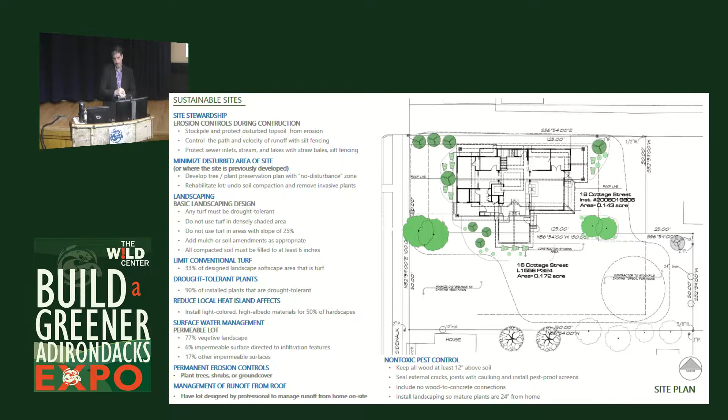We tried to keep the lot at over 77% vegetative landscape. You'll see that we did incorporate a lot of rainwater management and control. But even during construction, we were very careful as far as how we disturbed the site. So we fenced off this entire area here, which had some nice existing vegetation, so that contractors couldn't go there at all. And then we created a stockpile area for soil and for certain things to be staged on the project, and then protected that with erosion fencing.

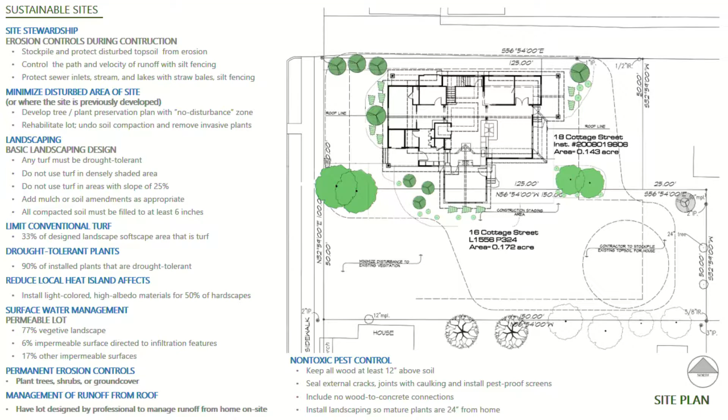So it was a little bit of a hassle from a contractor standpoint, but in the end, it really made a difference, because that whole prominent corner, which was really the front of the house, was able to be undisturbed. And as we got into the landscaping design, we used native plants, we used drought-tolerant plants, and we tried to minimize the amount of turf area, so less than 33% turf.

When it came to the building itself, we looked at lightly colored materials, so even though we knew the roof was going to have photovoltaic panels and solar hot water, we looked at using some lighter colored materials, and looked at where we could put permanent erosion control too. Even though you're in an urban environment, in most urban environments all of the stormwater runoff just ends up in the storm sewer. And there's rarely requirements for stormwater management and control on a single family house in an urban environment. But in this case, it was really thought about to try to minimize that impact onto the storm sewers.

But we took careful attention to the selection of the paints, stains, glues, adhesives, what the cabinets were made of. They used local woodworkers to make cabinets, all out of natural wood, solid wood products. We minimize the use of even plywood in certain components of the house. And we use low or no VOC paints and finishes.

Along with that, there was a real desire to use recycled or reclaimed products. So Katie, who's one of the owners, went to different salvage stores and looked for interesting architectural elements, and we thought about how they could be incorporated into the house. So you'll see some examples of that.

The house is a passive design. It faces solar south. We put a sunroom on the south side with a slab and tile floor, and surrounded it with glass, and had windows and doors that would open up to it, so that could act as sort of thermal mass in the house.

In addition, in the center here, there's a Kachelofen stove, or what you call a Finnish stove, so a masonry heater. It was built by a local mason. With most of the conventional American colonial fireplaces, 90% of your heat goes out. Great thing for ambiance and aesthetics, but not a super efficient heating source. So here the exhaust actually goes out the side, down and through a series of tubes, and then back up. And those tubes are worked into the masonry.

This was a quartzite stone. Probably one of the most efficient is like a soapstone product, but the quartzite holds and radiates the heat really well. It's also a locally quarried Champlain stone product. And the heat is so efficient that you can actually create a bread oven above it to utilize that excess heat.

You can see here that this house is unique because they have their own business and they work from home a lot, and they had 2 kids at the time that were young and growing, and they had some aging parents that came. And so how do we combine work, live, parents all in one space, and children, and how are they going to grow in the house?

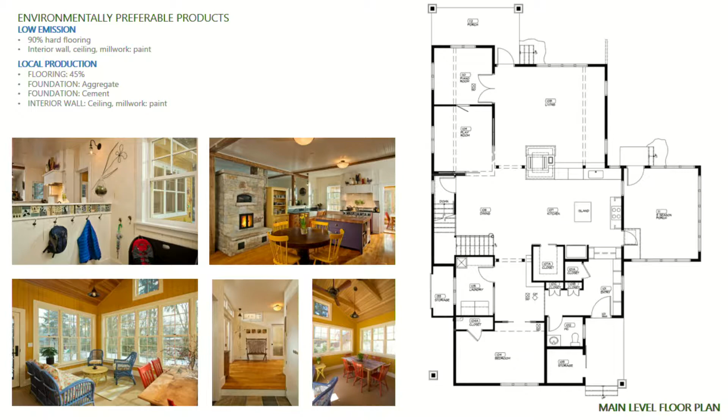We had a front bedroom, thinking of aging parents in time, that they may end up staying here, or his mother, and initially it would serve as an office, and then a playroom for the children, that had a series of large sliding doors that would open up and be a flex space as the children aged. You want to be able to close those doors so you don't see the mess when guests come over sometimes, but later on in life, it just becomes sort of an extension of the dining room and

the living room. And the family is very musically oriented, so we had a sound rated room where they had the piano and they could practice, and Katie teaches piano lessons, so when she has people over and she's teaching people, they can kind of isolate that from the rest of the house.

The materials inside, a combination of poplar and cherry, and simple, and a lot of pine, tongue and groove pine planking, locally sourced and milled. All the wood and timber in this house was from FSC certified sources, so that was something they were really committed to. And this was in 2009, 2010, so it was a little harder back then to find all the sources for that, but that was something we were able to do. Coming from sustainably managed forests was a priority for everyone in the project.

You can see as you move to the second floor, that open plan really continues. So in a lot of our designs, we try to avoid hallways. The most efficient and cost-effective structure to build is a square, right? So your ratio of exterior wall to interior wall is 1-to-1. And also, we often try to design on a 2-foot module so that we're really minimizing construction waste.

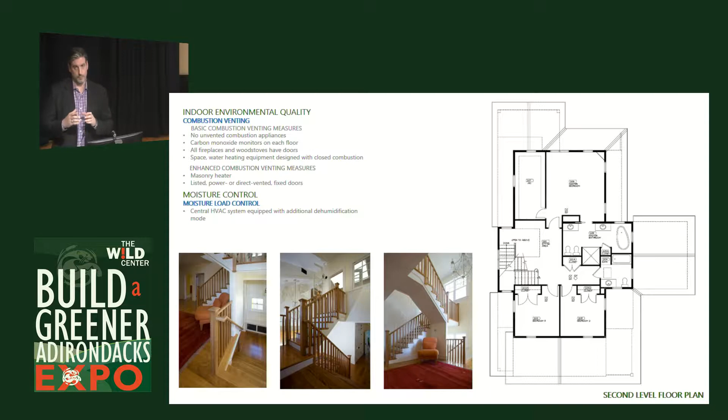Probably one of the biggest achievements of this house is the builder who was hired, and the carpenter really took minimizing construction waste to heart. So we did 2-foot framing, we planned out all the studs, all the sheets of plywood, and then any of the scrap studs he kept and stockpiled and used for blocking or for infill. At the end he had a picture, which I wish I had, of what was left at the end of the job, and it was really an amazing thing. And I give complete credit for that to the builder, managing the crews and thinking things through the job, so really minimal waste.

Fairly simple plan, second floor master suite with the two spare bedrooms for the 2 children. You'll notice in the plan we stacked all the plumbing in one area, which is really over in this area, and that translates down through all the plans. The HVAC system was a high-efficiency system. I mentioned the geothermal, put high filtering in, and also dehumidification control.

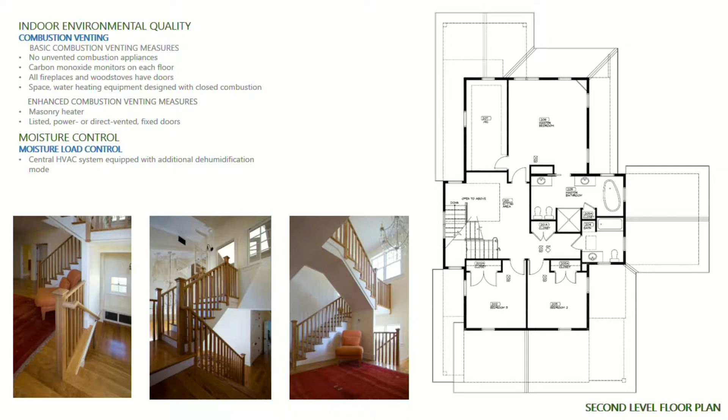So moving up, probably the most unique feature is that they also teach movement and dance classes. So where are they going to put this space? Originally we thought of it as its own little barn or its own little structure that might be on that second lot, or it might be an appendage. And really through planning, we said, let's keep this as efficient as we can. And we stacked these things. We had a side door that comes into that stair there, and they go up one flight into the music room. So this is more of a public space.

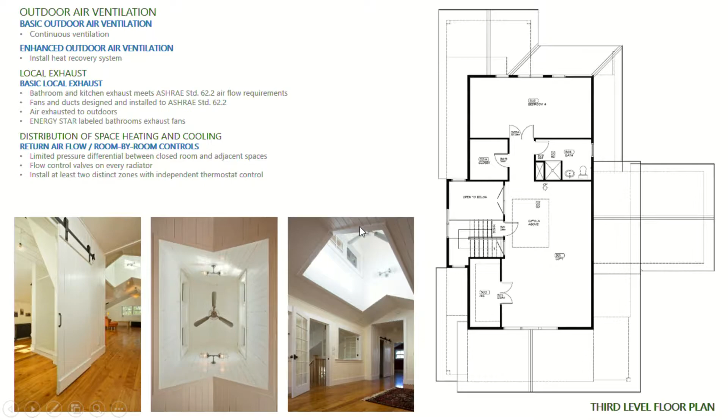And then some overflow sleeping bedroom, but this is the movement space here. Here's that stair that opens all the way down to below. You'll see that we put a door at the top and some windows, so if they want to close it off and try to separate sound, we can do that, but allow that thermal chimney to take effect. So here's some pictures of how that worked. Just a little overview of that.

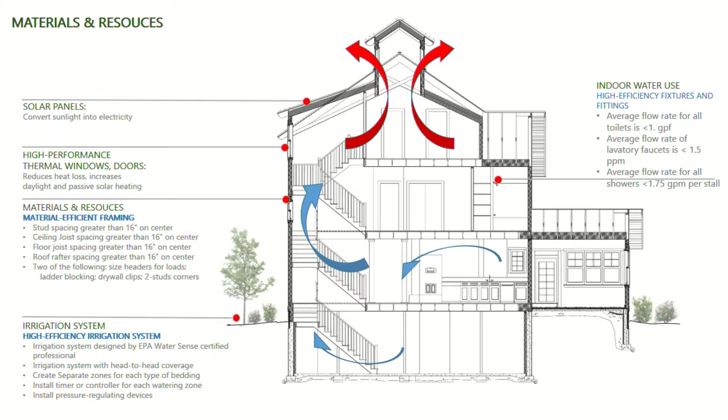Of course, we looked at low flow toilets and fixtures. There were high performance windows, and then the 2-foot framing and then the irrigation system. They did actually put rainwater catchment in this house as well. They're gardeners and active. They grow a lot of food that they like to eat, so we collected the rainwater off the roof, put that into a cistern, and made that available for their irrigation needs as well.

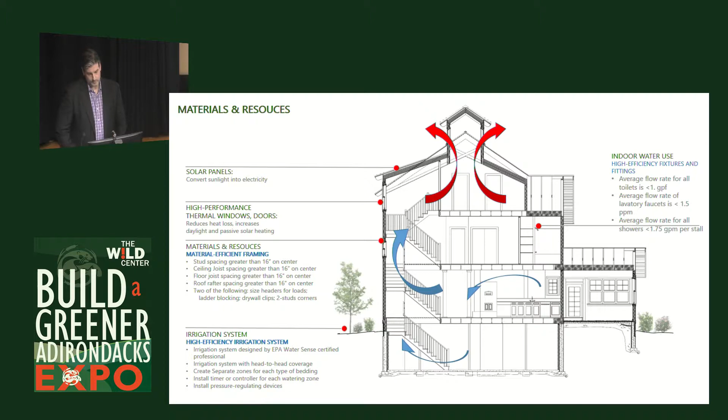But you can see the house is really kind of a simple footprint. It kind of looks like an old timber frame barn with that stair that wraps up the one side, the north side.

Just some highlights of that. We really tried to keep the planting a variety of perennial flowers and then bushes and native plants and mulch. And we kept the turf area really to that southern face, which would be the open area where the children could play.

So highlighting that Kachelofen stove, this is a technology that's thousands of years old, combined with simple geometry. And even though we added the technology, I always say start with the simple first. So how do you place the structure on the lot? Where are the winds coming from? Where is the solar access? How are the overhangs designed? Set those overhangs to block the summer sun, but let the winter sun in. Combine it with simple technology first, and then add the high-tech stuff.

So, 80% of our projects just do that, and we don't get to the high-tech stuff. Not everybody can afford a geothermal system or humidification or house controls or energy controls, but for most people, with just simple planning from day one, it can be accommodated.

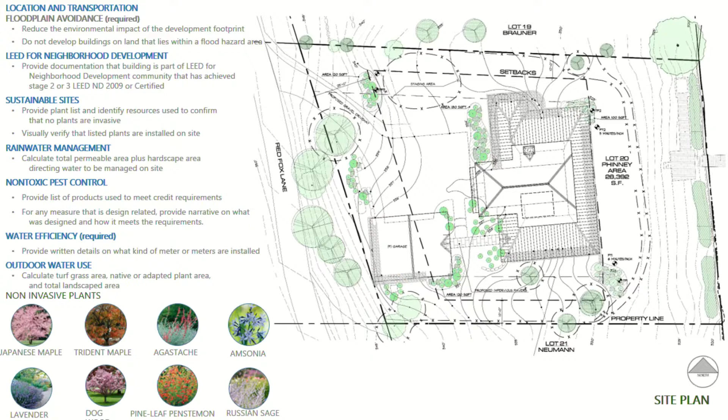So how do you come up with a new house that's going to incorporate a growing family with lots of visiting family area that they hope will be a multi-generational structure, but also not mess up the site and not impact the site too much? So we went from a one-story program to a three-story program.

And given its proximity to Lake George, it's sort of unique where it forces a lot of architects, designers, owners, whoever, to really think about these site conditions and environmental impacts. You have the Lake George Park Commission, you have New York State Department of Environmental Conservation, you have the Adirondack Park Agency, you have the Lake George Association. So you have four different organizations that are either trying to educate you about impacts to the lake and the natural environment, or they're regulating you as far as these are the rules that you must follow.

And so we took that to heart and said we really want to go above and beyond those rules and regulations. We want to be in excess of that. So the site design and the stormwater control management was a big part of the selection and layout of the project. And you'll see later some series of rain gardens. We really minimized turf to be a small strip that went around the north side, and then a little strip across the front here. And then everything else was a series of bioswales and rain gardens and mulched areas to capture and control and mitigate any runoff to the lake.

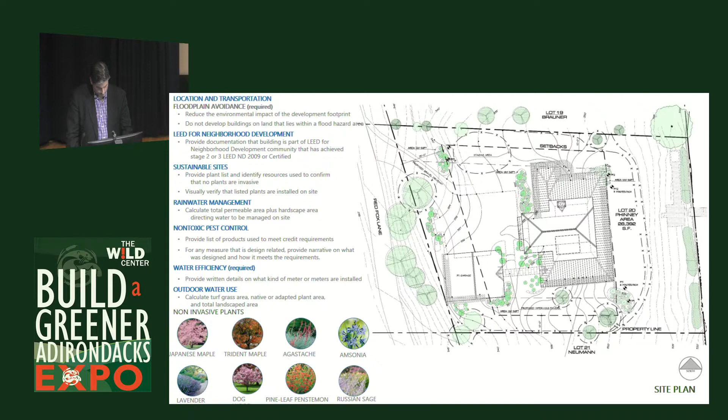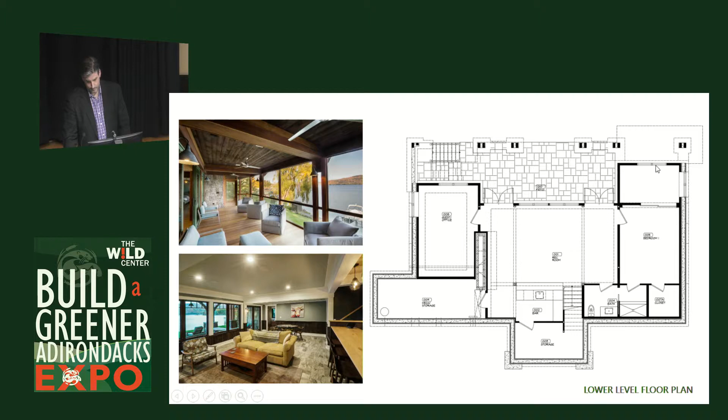So looking at the house, again, this was essentially the footprint of the old ranch. So how do we get this new design to work within that? And thinking about a three-story design that would accommodate a growing family and also allow for overflow. Desire to have an office here as well. So on the lower level, we had guest overflow sleeping, but it would also serve as a main office, rec room, and guest quarters. Moving up, you have a large family gathering area, master suite, and then the kitchen.

This faces east, so one of the struggles when you deal with lake properties and you want to try to incorporate passive technologies is everyone wants to face the lake. So this faced east, which was better than facing west as far as a design challenge. But we did try to minimize the openings on the north and west side, and then maximize openings on the east and south side, particularly the southeast side.

We designed the house to really open up and grow. With a lot of summer homes, peak population is in the summertime, obviously, but then how do you cocoon back into the wintertime? And so we thought about that in the plan. So rather than building more heated and cooled square footage, we really put a large screen porch off that east side.

And there was some concern that you're going to be blocking the views and the light and things like that. But what we found is when you open all of those sliding doors and you open the main living space to that screen porch, it just feels like one space. And the client and their guests have a tendency to mill through that whole area. And then in the wintertime, it is closed down and it is a little bit more of a cocoon feeling into the core of the plan.

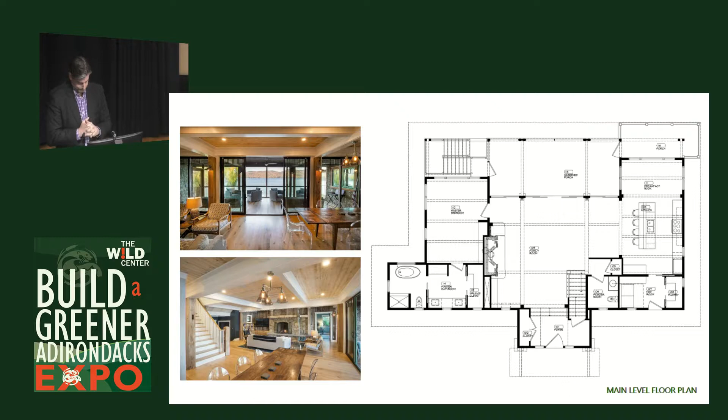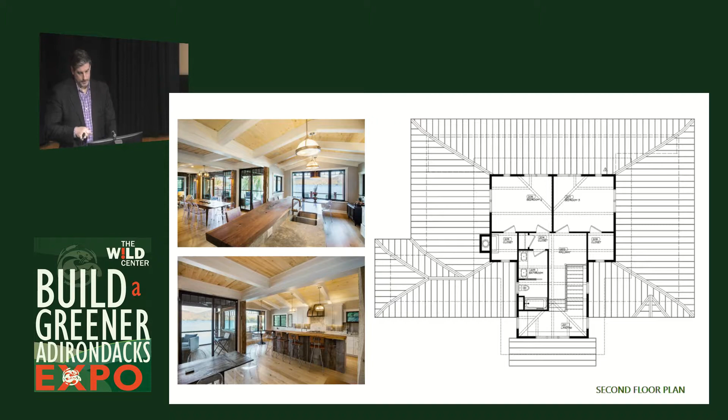And then moving up is just the two bedrooms for the children, sort of efficient bath. You can see again, in this design, we use the stairs to be a thermal chimney. It's vaulted up to that main level with a series of two ceiling fans that are reversible. So in the wintertime, we have them set to be on gently, pushing down. In the summertime, we have them sucking up.

Most of the bedrooms are designed for cross ventilation, so with that, tied to that thermal chimney that stair provides, and you leave the doors open and some windows cracked, you really create a negative pressure in the house, so that when you're in the lower spaces, it's almost like a cool breeze is happening all the time, because it has a tendency to pull up through the central core.

Materials in this house were all white oak material. It's locally milled and sourced. A lot of the accents that you see in here, some of the columns and the wainscoting were also reclaimed material. That came from a company called Storied Boards in Lake George. And if you haven't heard about them, they're a great company to look up.

They go and salvage different barns stick by stick, and they clean them, kiln dry them, and then they give you a chain of custody to the original owner and what the story behind that structure was, where it came from, who was the family that built it. Great company. So we tried to highlight them a little bit, use some of their materials throughout the project.

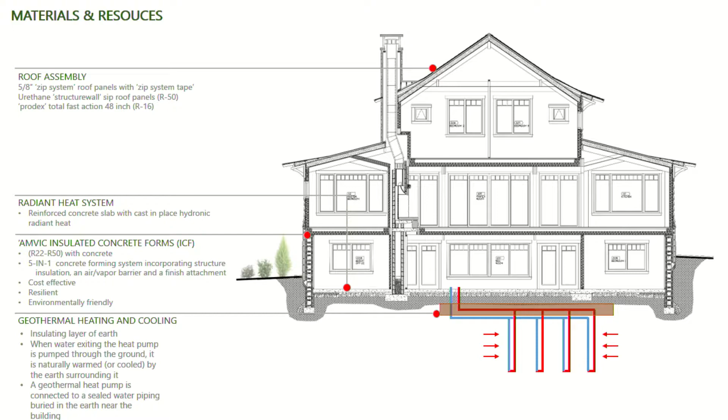Some of the other elements that were added were the insulated concrete forms for the entire lower level. That's mostly earth bermed. That comes in at about an R50 once the concrete is in. The roof was all a SIP panel roof, along with a radiant barrier. So both the roof and the walls used high insulative materials, but then an additional radiant barrier was added, which is a foil face bubble wrap. In this case, it was a Prodex material.

So it really upped the thermal envelope of the house, getting us to near R70 in the roof and almost R40 in the walls, along with an R50 lower level. So the house is very snug and very heat efficient and cooling efficient. And what we've found is that radiant slab in the lower level, that's the only place where we put radiant other than the tile floor, a couple small tile areas in the main level.

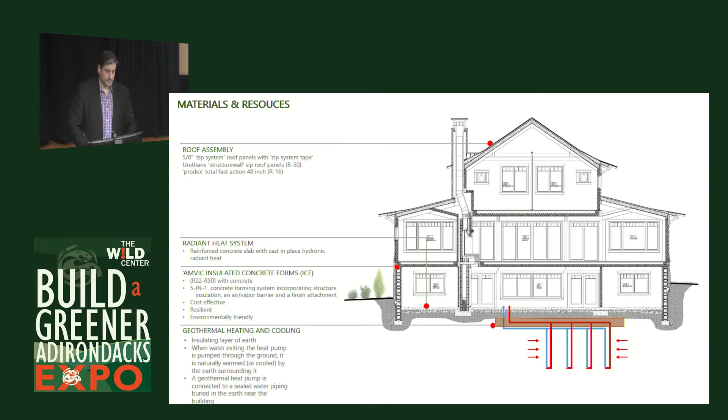But once the radiant slab is heated up with that high performance envelope, along with some solar heat gain in the wintertime, the house stays at a very comfortable temperature with very little energy. And that's a combination of technology, but also geometry.

Some of the additional pictures. You can see here where we've put this new shoreline buffer in, and had the turf limited to the front and the side. And again, we've used this pretty deep drip strip. So all that runoff comes and hits the same technology that we used in the house before. It's all piped underneath and then gets directed to the rain gardens if needed.

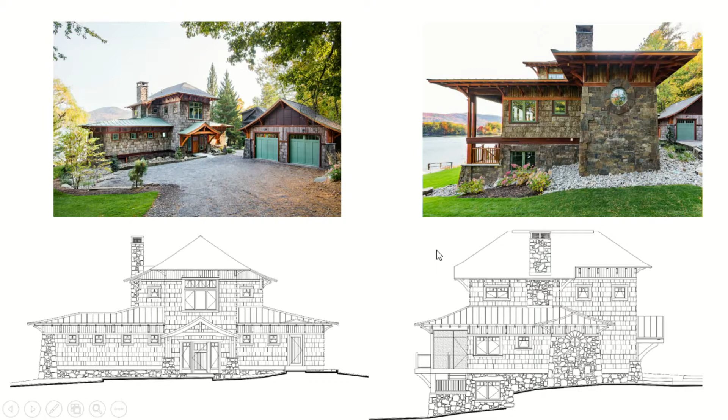You can see that there's pretty good topography on that driveway side. So there's a mountainous area to this side, which would be the west side. So we knew that during big rain events, this was going to get a lot of water. So this entire area across the front and around here, we made one large rain garden bioswale so that the water could all get in there, soak in, and any overflow would then go down the series of drip strips to another rain garden. And then if it got beyond that, you would have a vegetative buffer before it hit the lake.

And it ends up being, we think, a nice aesthetic change from a landscape design, the different materials, the rocks, and so on. This is sort of standing in the middle of that, so you can see it becomes a bit of a sculptural element. This house was influenced a little bit by Japanese design, sort of a classic pagoda layout, so the layering of the Doug fir soffits

and different materials. This was a poplar bark siding and then bark-on white cedar. The bark-on white cedar was locally harvested and milled. The poplar bark came from a little bit farther away. But that combined with the locally quarried stone, other than the timber accents, which are typically tucked up under the eave, it becomes sort of a maintenance-free building. You don't stain or paint any of these materials, and they last decades with really minimal maintenance.

The soffits and the timbers are the things that will require maintenance, but they're tucked up under the eaves, so they get minimal UV exposure and really no moisture exposure. So those really need to be stained and painted every 7 to 10 years rather than every 3 or 4 years that a conventional cedar house or timber might need.

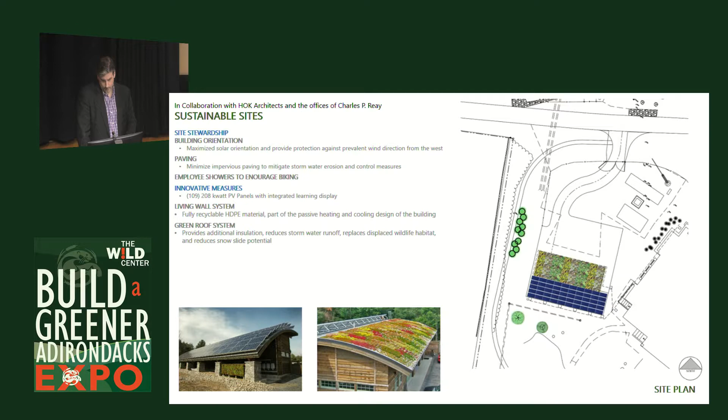Normally these things have a tendency to be kind of prefabricated metal maintenance buildings. It's like, oh, that's the maintenance building. But in this case, I think it really became a gem as an interesting visual icon and complementary to the museum itself. The museum and this building use a lot of locally milled bark-on white cedar log siding as accents, and also locally milled rough Adirondack pine siding.

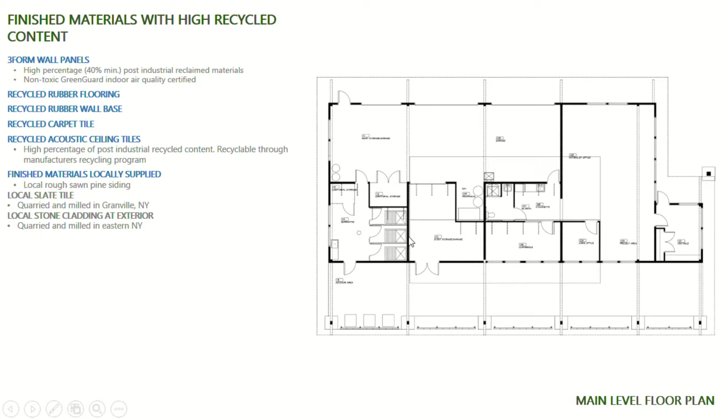The plan was fairly simple. Created office area for the staff, flexible office area, some small offices, a conference room, some support space, and then the maintenance building along with the biologists area and the quarantine area to treat the different animals and wildlife that are their guests at the Wild Center. Some pictures of that as it was finishing construction.

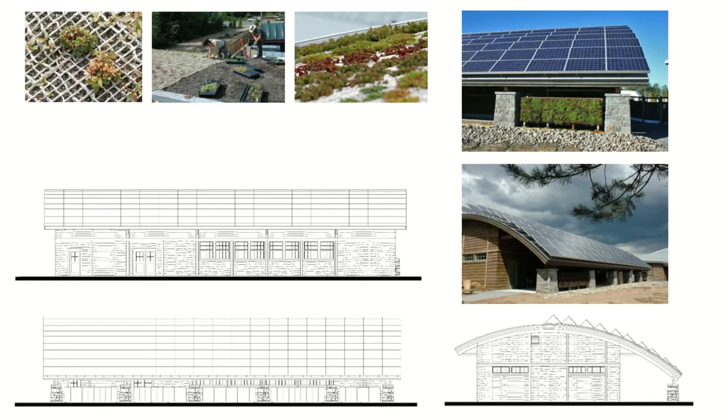And planting the roofs, I still was amazed at how they did this, and it really was a labor of love. We had to study that slope very carefully, and we put a series of little break dams in the soil so that the soil wouldn't erode off the roof in a really heavy rain event. And now that the plants have really matured, it's doing what it needs to do as far as minimizing runoff and staying cool. So a quick overview of that and the different features that we incorporated.

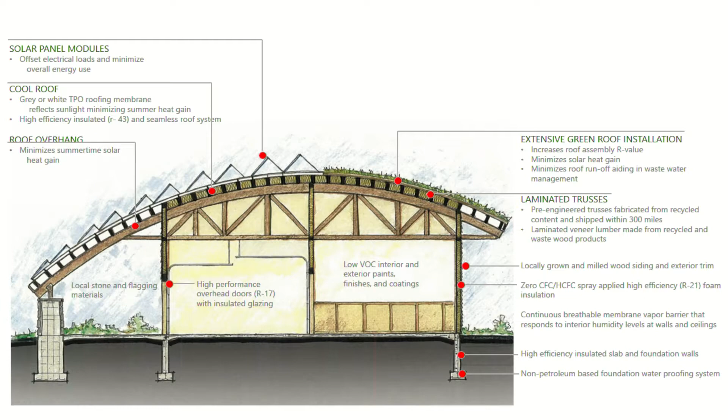Obviously the solar, the green roof, the laminated trusses. We used foam insulation. Again, a lot of highly recycled content in all the materials, the flooring, carpeting, rubber base, zero VOC or low VOC paints and finishes. And then we even looked at the CFC and HCFC content in the foam.

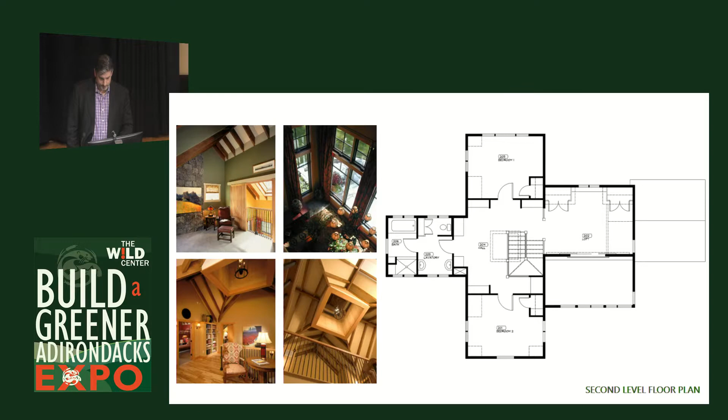So I'm going to glance over this one because I want to end with this: this was another project. This was the first certified healthy home in the Northeast, and it was a 2004 showcase home in Saratoga Springs, which was really to benefit a local charity. And it was the first sort of green home in the Saratoga area and ended up sweeping the awards that year, which I was proud of, not about getting design awards, but I was happy that a green home that was very sustainably minded would be recognized for its aesthetics.

And a lot of people who went through the house, some picked up and understood what was in it and why it was environmentally friendly. But it was after that we were able to sort of tell the story. We were able to use that as a platform of, hey, did you know that the following things were accomplished in this house? And again, very similar technologies to the other two houses that I talked to you about.

And some of the finished pictures here, again, the house was on the east-west axis. We used a cupola for a thermal chimney, centrally located the stair. We designed the overhangs to block the summer sun and let in the winter sun. We purposely had the dining room be on a slab with tile floor and use this as a thermal mass here. And we want to encourage the sun to come in and heat that area up, and then create thermal convection in the house. Cross ventilation in the bedrooms.

And here you see a series of natural materials. Here's that slab that extends all the way into the dining area. Again, a lot of our designs, we try to incorporate decks or screen porches to allow clients to overflow or expand out, but not necessarily have to create more heated and cooled space. Allow them to live in the house seasonally, experience that connection to the natural environment.